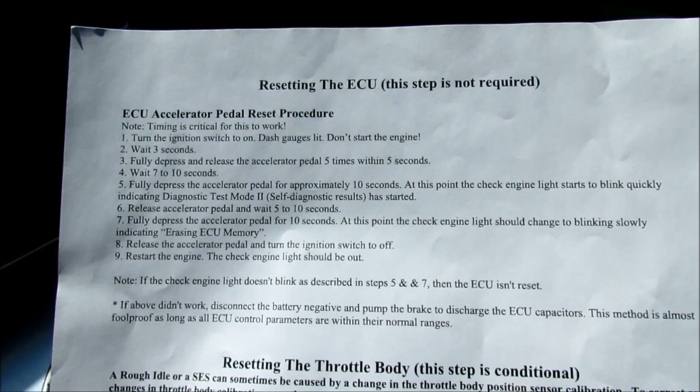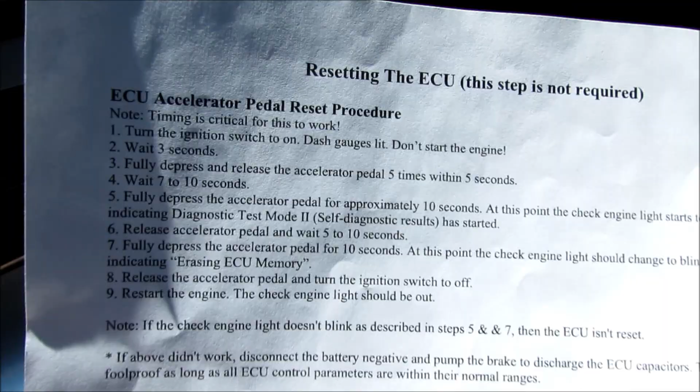As you look out on YouTube, there's a lot of videos where people make you do the pedal dance. Resetting the ECU will not actually help you with the idle relearn procedure; that's the only time you really need to do the pedal dance. So if you're trying to do the pedal dance to reset the ECU, it's actually a lot more difficult than it needs to be and kind of a waste of time.

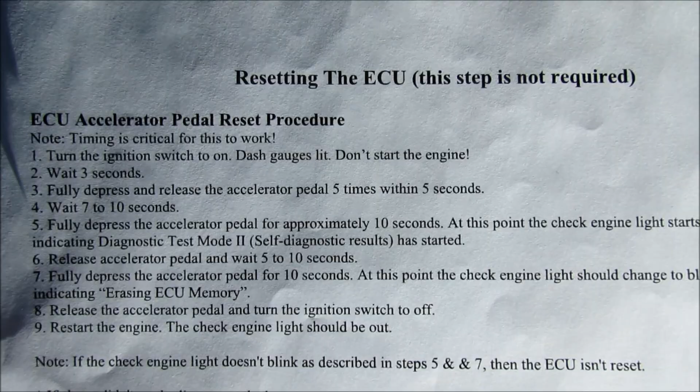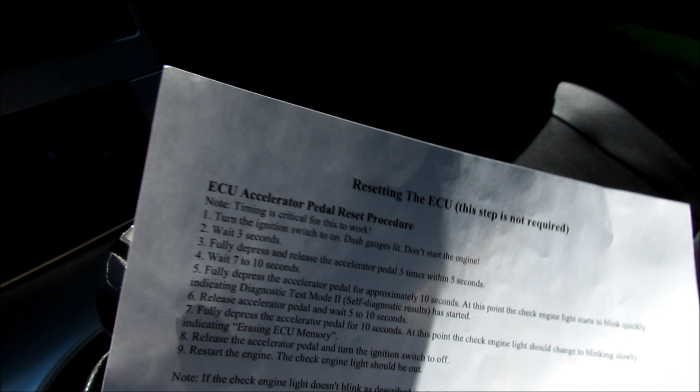There's only a couple times you should really reset the ECU, and that's if you don't have a tool on you and you're trying to clear a code. That will clear the code for you, but it doesn't actually resolve the problem. The ECU will again pick up whatever the problem is because it's not within the specifications the ECU has for the item it's measuring. It will flag a code again.

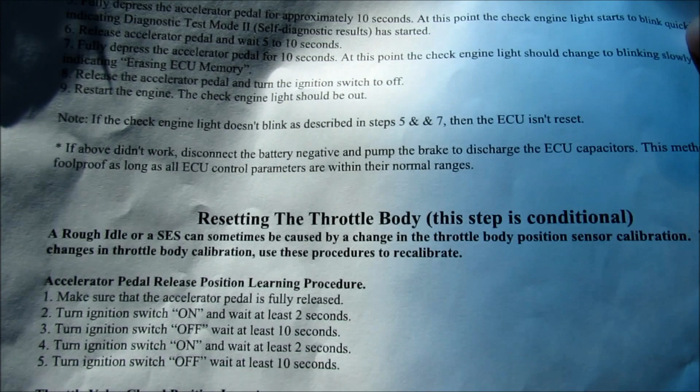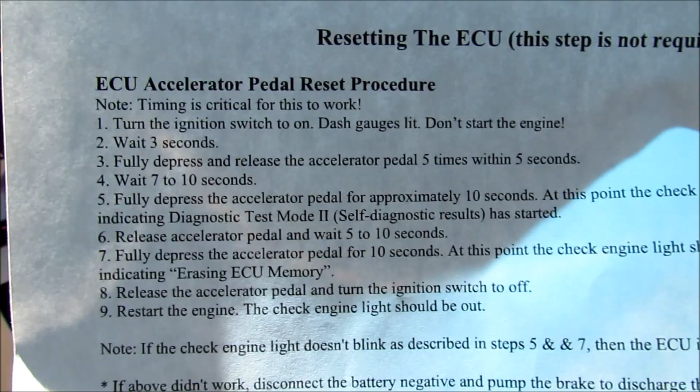So if you don't happen to have the tool on you, such as a tuning cable like this by MREV2, which is the easiest method to clear codes and also read stuff, or an OBD2 reader, this is the easiest method instead of doing the pedal dance to clear the ECU. I'm going to show you how to disconnect the battery cable, and we're going to pump the brake pedal to discharge the ECU capacitors. That will reset the ECU the fastest and easiest way, and you do not have to do these 9 steps. You have to do one step: unhook the battery, pump the brake pedal.

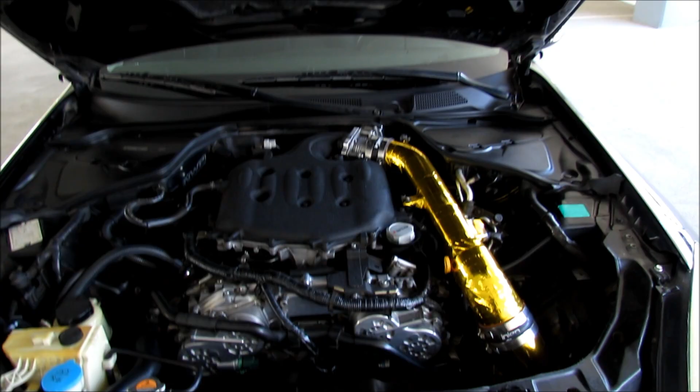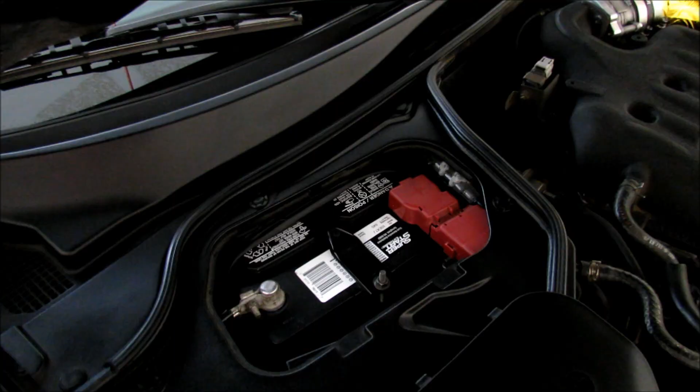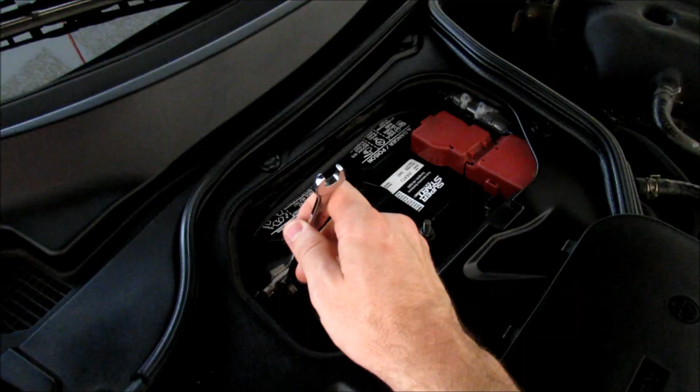Right here is a battery case to get to the negative battery terminal. A couple things I wanted to say: if you're getting this code, you can go to any parts store, O'Reilly's, AutoZone. They will take a code reader and read the code for you for free. It depends on what state you live in if they will clear the code for you. If you live in a state like Ohio, where they do not do emissions, they will clear the code. If you live in a state where they do emissions, they won't clear the code for you.

But if you get real smooth talking with the guy, he might give you the OBD2 controller and let you press the clear button on it. The thing is, when it's giving you a code, you should actually look at what the code is instead of just trying to clear it right away. I had this happen to me where I was getting a lean code, and I knew I didn't have anything making the car lean, and I cleared the code, and about a month and a half later it came back. Then I cleared it, it came back maybe 2.5 weeks later, and then it came back a week and a half later.

That was my O2 sensor actually going out. There's 4 O2 sensors, but this was the one in front of the catalytic converter, because this is the one that actually senses the air to fuel ratio. It was giving a lean signal as it was going out. So the best way is to actually read the code and try to figure it out. But this is a method, if you don't have the tool, to clear the code. So we pull this negative battery cable off, as you can see.

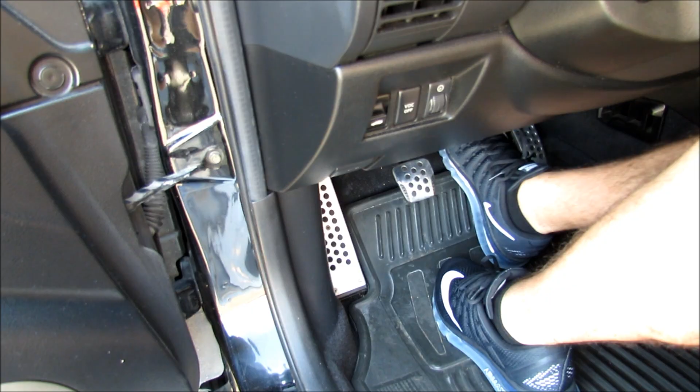The next step is we're going to pump the brake pedal to discharge the ECU capacitors. Just pump it a couple times, it's all you need. You don't need to unhook the battery and wait an hour to clear the ECU. All you have to do is unhook the negative battery cable. You should always unhook the negative battery cable first, never the positive. And then pump the pedal a couple times, and that will clear your ECU.

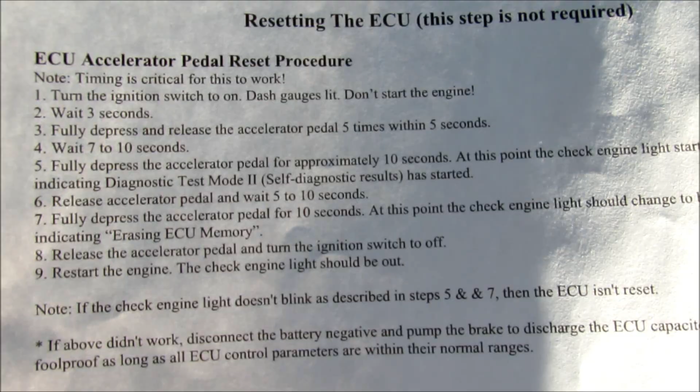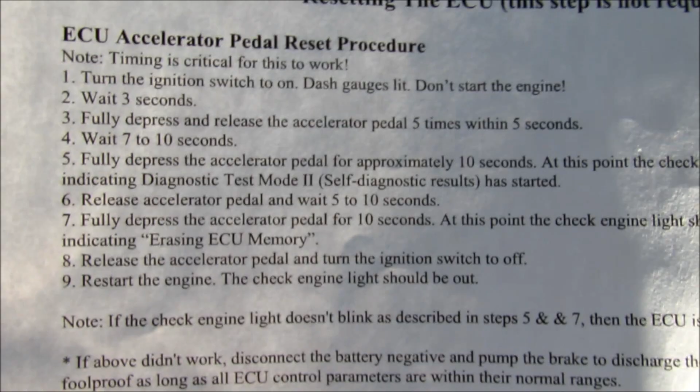It's a myth out there that clearing the ECU will actually help you with your performance mods. It does nothing. The ECU is always learning the parameters as you drive. There's a guy on YouTube who has a video where he carries these instructions in his glove box because he says a side effect of having a modified car is that he might have to reset his ECU parameters. I think he's in La La Land.

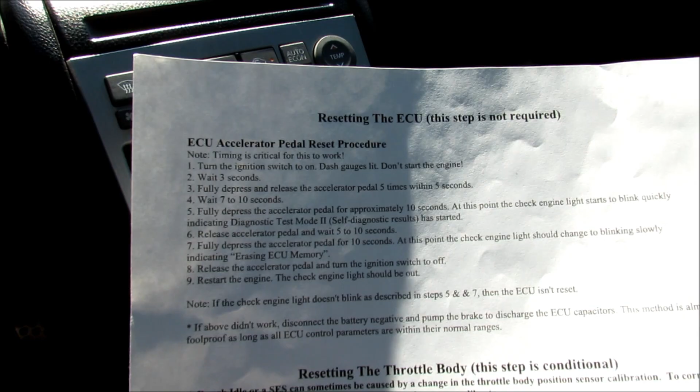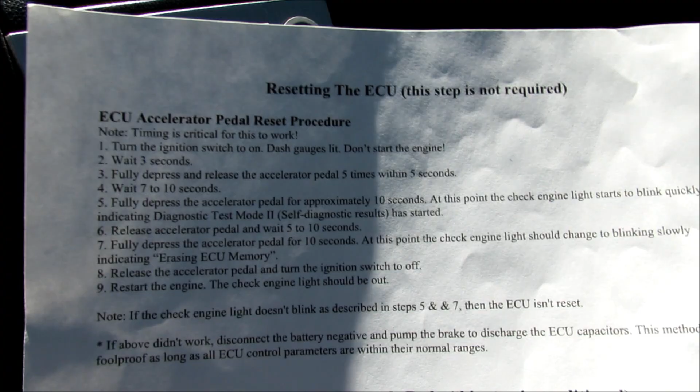Alright, that'll complete resetting the ECU. I just wanted to bring up a couple things about resetting the ECU. Say you made a repair, but you did not have the tools to clear the code. This is how you would clear it, and this would be a good time to do it because you just made the repair and you want the check engine light to go away.

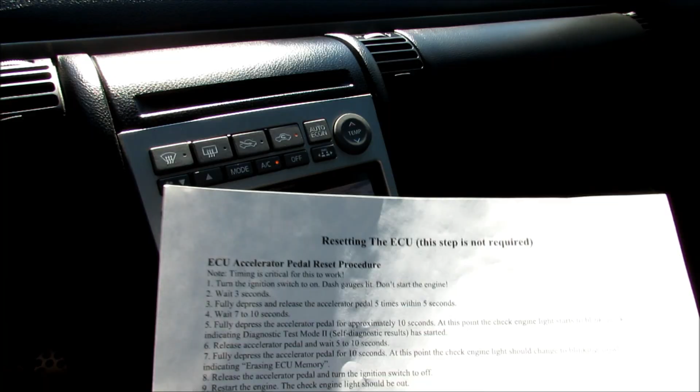Something I find interesting is I have a BMW E46 also, and it's the first car I've had where if you disconnect the negative battery cable, the check engine light will not go away. It has an adaptive learning system. As soon as the ECU sees the problem's been fixed and it's back in specifications, it'll automatically clear the code on its own. Unfortunately for Nissan, that doesn't happen. When you make the repair, the code will stay on, so you have to erase it. And if you do not have the tools, this easy method I just showed you, instead of the pedal dance, is how you would erase the codes for your Nissan or Infiniti.